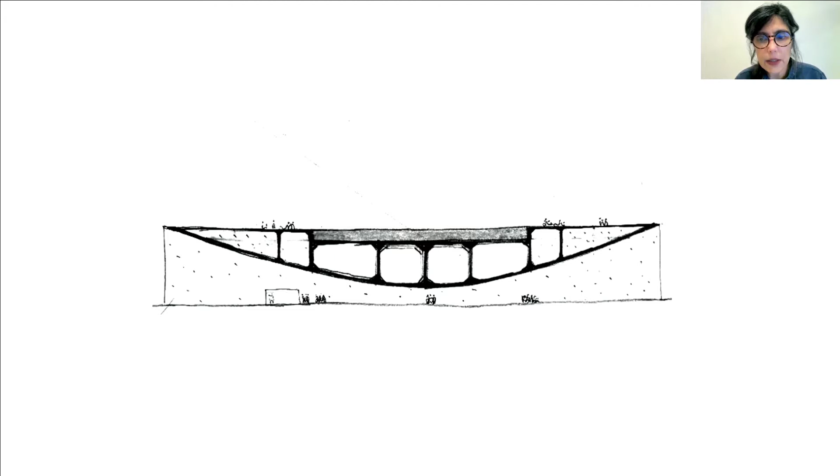In the middle of the Praça da República, a very important square in the center of the city, two concrete buttresses on the ends of 100 by 100 meters suspended volume configure a public swimming pool, and at the same time forms a marquee which provides shade for varied events, a party, a market, a meeting, an urban beach.

Architecture is made by people through the creative enjoyment of possibilities as they present themselves.

To imagine a SESC where the swimming pool is a fundamental part of the program in the center of São Paulo meant for us to imagine the biggest possible pool in the sun between the dense mass of constructed buildings.

It is amusing to think that the real estate market builds small pools on rooftop apartments that are marketed as a high luxury few can afford. And this is a popular public swimming pool with a capacity for 400 people simultaneously.

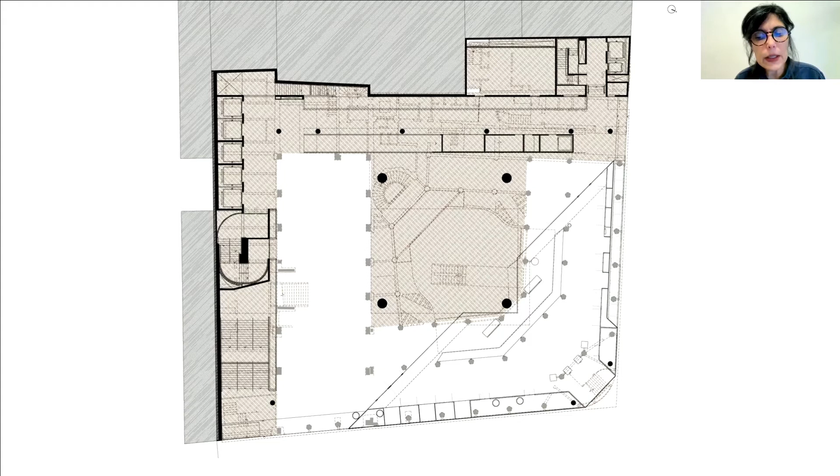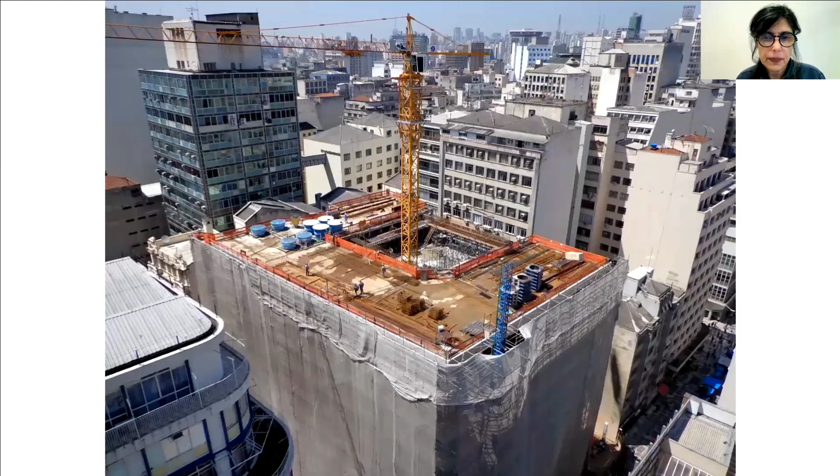The central void was also strategic for the organization of the construction, where a crane was installed once the entire lot was taken over by construction. That is the last floor of the existing building. The swimming pool above it.

In addition to the concrete pool, a large steel structure along the three limits of the new upper volume complements the solarium, and what corresponds to the depth of the tank accommodates the pool's changing rooms.

The set of activities is organized vertically, with each floor dedicated to a specific program, but related in sets of two or three floors. In some cases, the central void is kept, creating an association between two floors, as for example with exhibitions and art studios, or with sports.

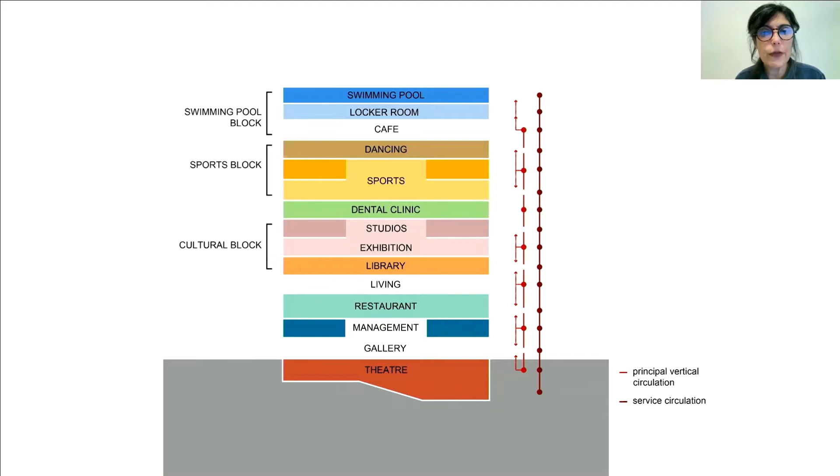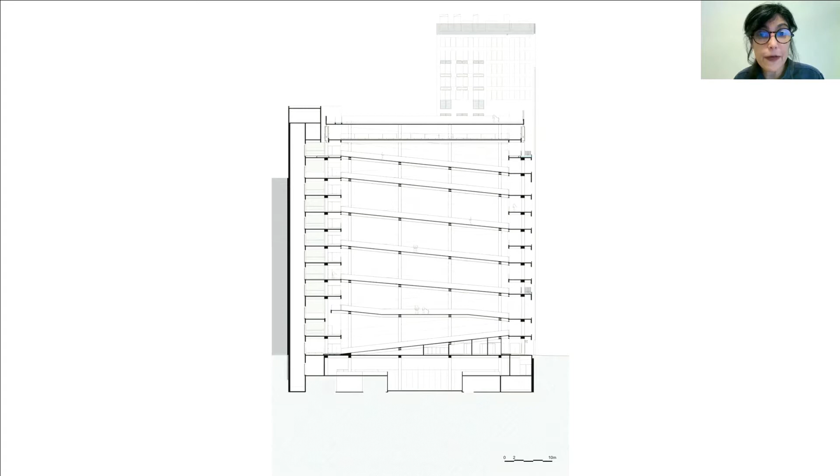In addition to the formal vertical circulation system of elevators and fire escape staircases, there is a ramp system running the entire length of the building as an extension of the sidewalk. It's like a continuation of a walk in the city where one finds different spaces: a cafe, a library, a square, a beach.

It is one way of experiencing the building in a very festive manner. The ramp itself is a place of meetings and games.

The Centro Novo, as this region of the historic center of the city of São Paulo is known, became what it is today between the 30s and 60s, with the construction of a notable set of modern, mixed-use buildings, with ground floors occupied by extensive shopping arcades that cut through blocks internally.

The corner was the access to the old shop. Although the building is no longer accessed from here, a large window onto the street was created.

This is one of the two accesses on Rua 24 de Maio. This is the ground floor plan, showing the double-height internal square I described earlier, with the reception volume forming the corner.

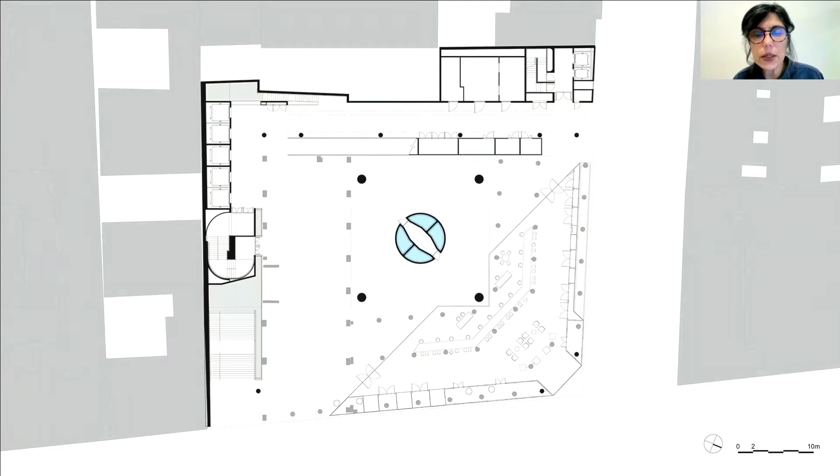He suggested that SESC should buy the building and made a beautiful comparison, saying the main building would be the ship and the small annex should function as a tugboat that approaches the ship for maintenance and refueling. SESC purchased the building, and this annex is where all equipment, toilets, changing rooms and storage are installed - a service annex, the tugboat.

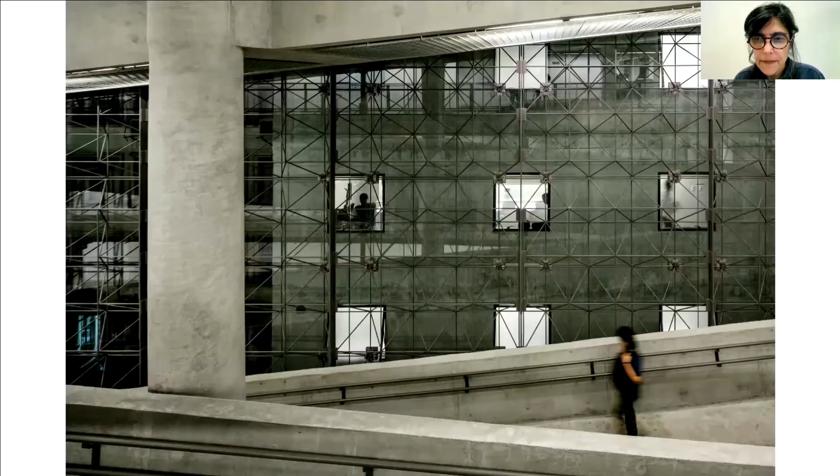An image of the square. The idea of the annex is always beautiful in architecture, the creation of your own neighbor. The annex can always be seen from the ramps and vice versa.

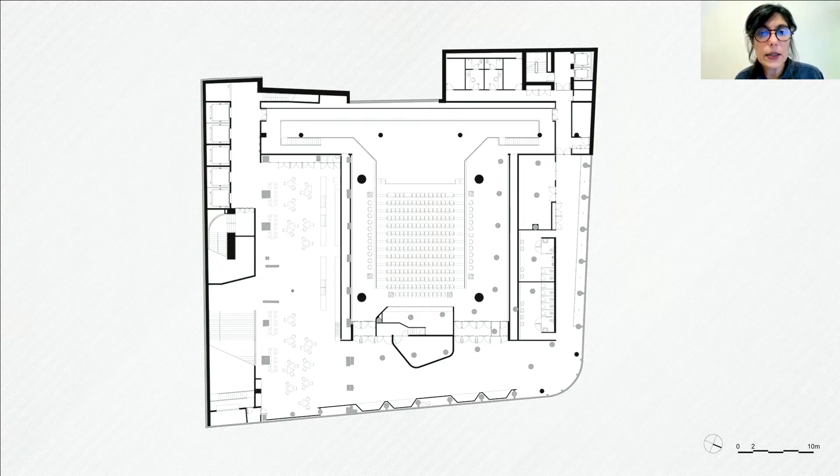The original building already had a basement used as a car park. We installed the theater here, which is still connected to the city by a 6-meter wide staircase - the cafe and foyer.

The original basement level was lowered by 3 meters in the central portion to form the void of the stage and develop the stalls, respecting the limits of the existing building's foundations. Dressing rooms are on the same level in the annex building.

At live concerts, people go to the side box to dance.

On the first floor, the administrative offices overlook the street and the internal central void.

The SESC restaurant is well known and popular, and at busy times a queue stretches along the ramps. I was told the other day that there was a street vendor selling sweets to the people waiting in line. I found it very funny, a completely urban situation.

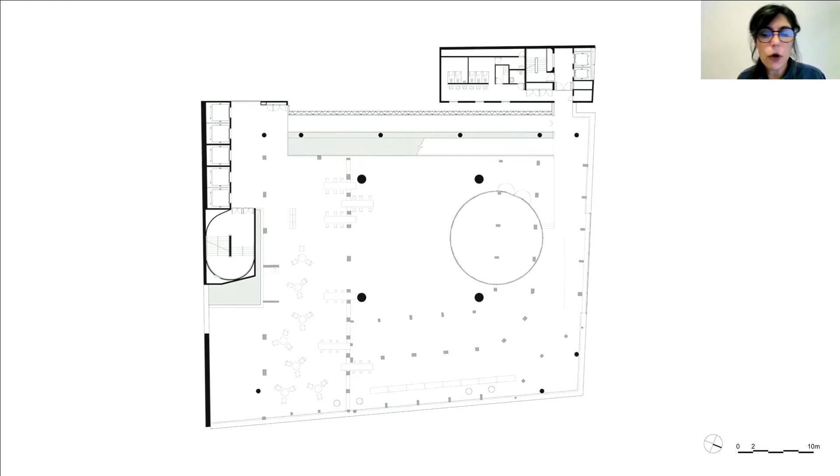Conviviality is part of the SESC program. This floor is open, without frames, free of any specific program, and functions as a strategically elevated square.

The library level. As I said, the library, restaurant, and conviviality make a block of the program.

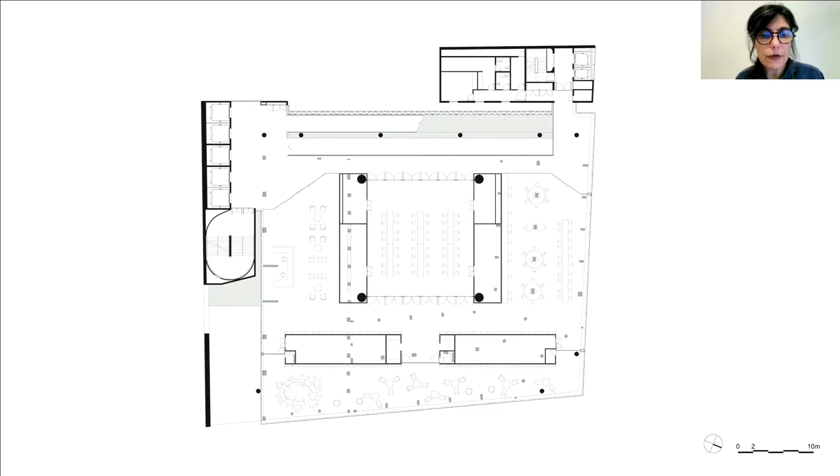The frequent columns were often used as support for furniture, as a strategy of transforming interference into something supporting an effective use.

The exhibition hall with a double height space in the center. The art studios are immediately above.

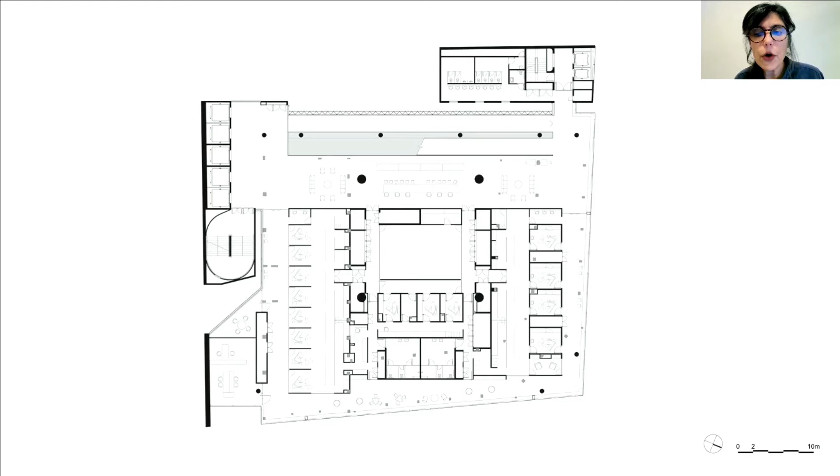The dental clinic. It's curious because SESC offers this health service among all the other cultural and sports programs.

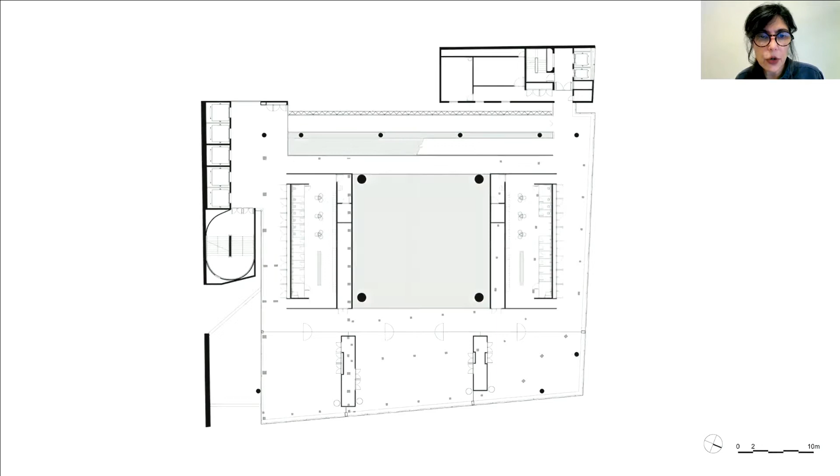The sports floor also has a double height central area. The changing rooms overlook the void that directly connects the two floors.

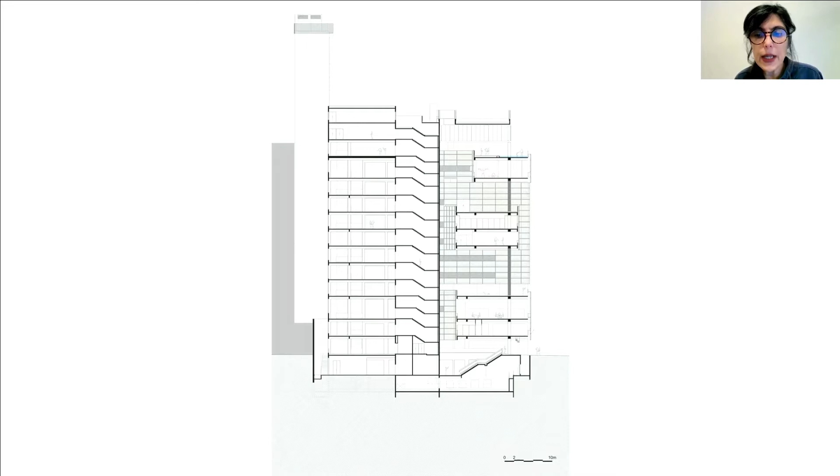This section shows one of the side alignments of the building, which in places abuts the neighbor, creating a situation of balconies distributed through different floors, with double or even triple heights. They are like elevated gardens.

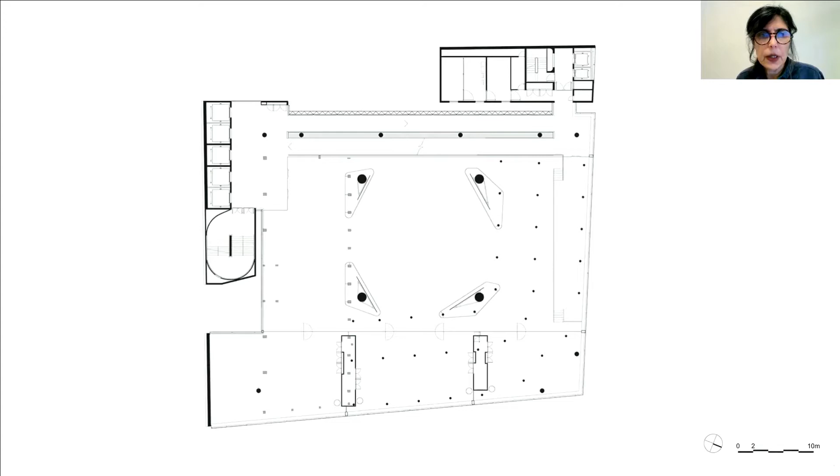In this case, it's the conviviality floor, or the sports floor, the swimming pool solarium. It is actually a lateral void that runs along the entire building. The dance floor: the 4 central columns support a set of bars and mirrors.

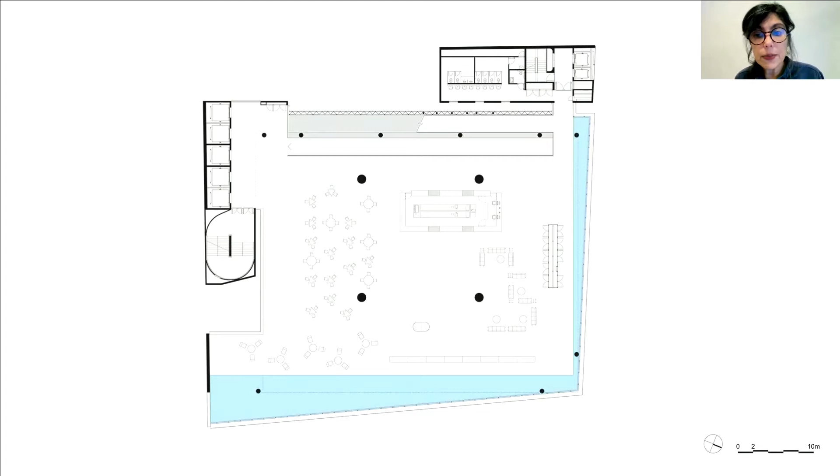This is the last level of the original building, clearly noticeable because all we see now is the new structure. It is the pool garden. Again, it's like a square with a cafe, which complements the pool program just above.

As the pool is one of the few places with controlled access for safety reasons, the reflecting pool on this level is a free water play area for everybody. Initially, we hadn't imagined this, but from the first day, people went into the reflecting pool and freely appropriated the space. Today, it is one of the most successful programs.

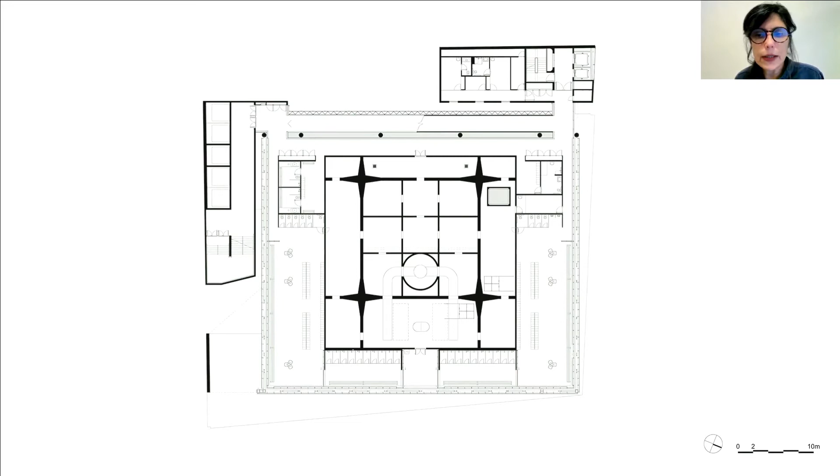The pool changing rooms are accommodated around the pool structure. The last stretch of ramp leads to the pool. The pool is 25 by 25 meters. It is the largest possible in this situation.

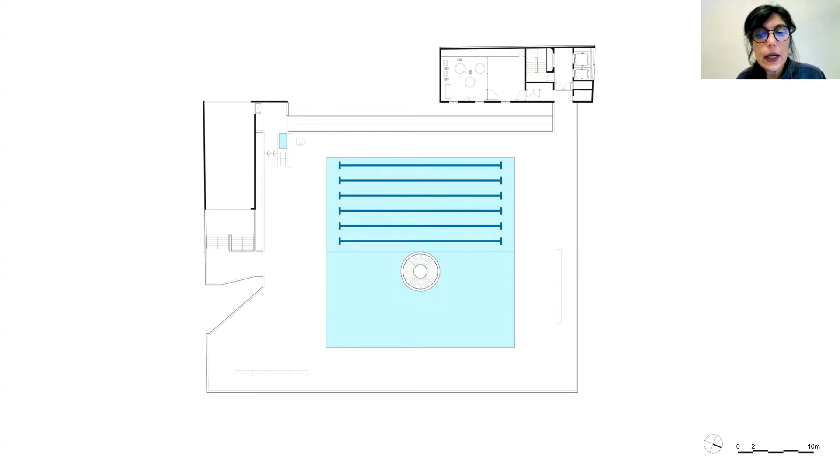We are also invited to design the furniture for the building. SESC 24 de Maio receives on average 10,000 visitors per day. The maintenance and durability of the furniture is an important issue.

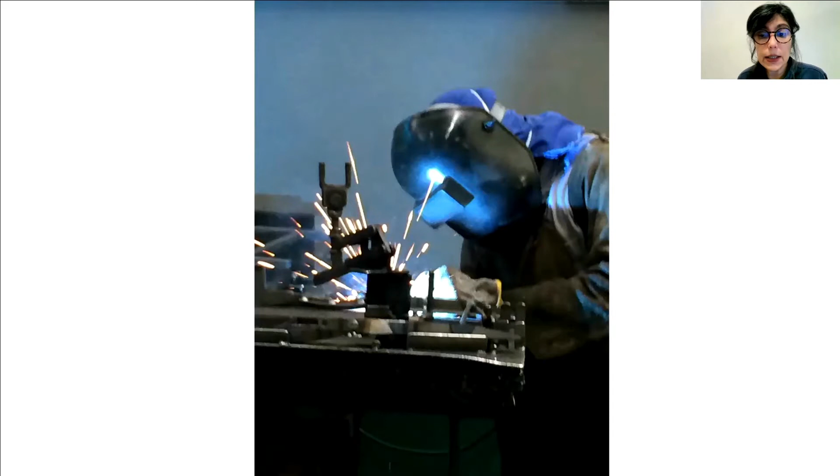This is why we choose steel as the basic material for execution of the furniture. We also like the idea of using construction labor, the solid bar, the metal sheet, the weld. The piece you see in the picture is one of those tools that are made on site to solve needs that arise. It is beautiful to observe the ingenuity and grace of the strictly necessary.

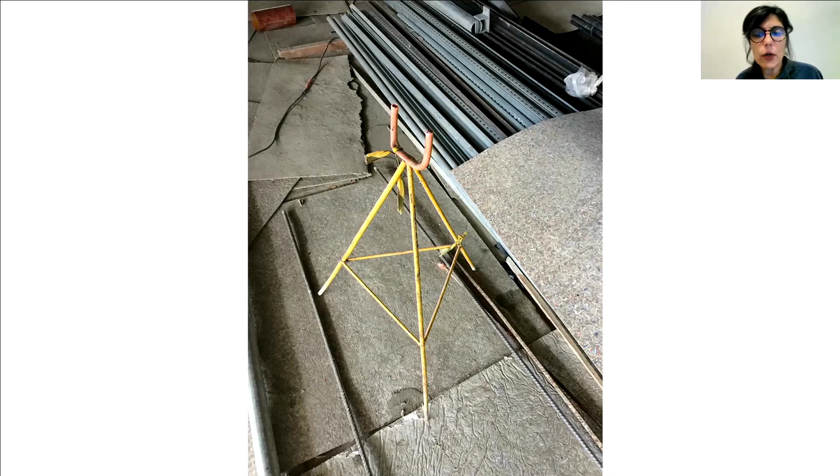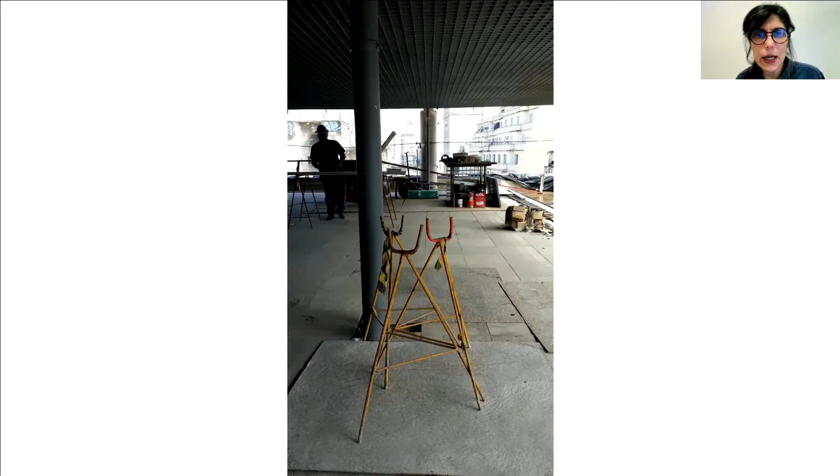The tripod, 3 points that define a plane, is the best way to relate to the often irregular floor of the construction. The piece attached on top is a support for all types of pipes or wiring during their installation, of quite varied heights.

This piece served as motivation for thinking about the design of all the furniture. The piece found in the construction became table legs with a different part for attaching the surface.

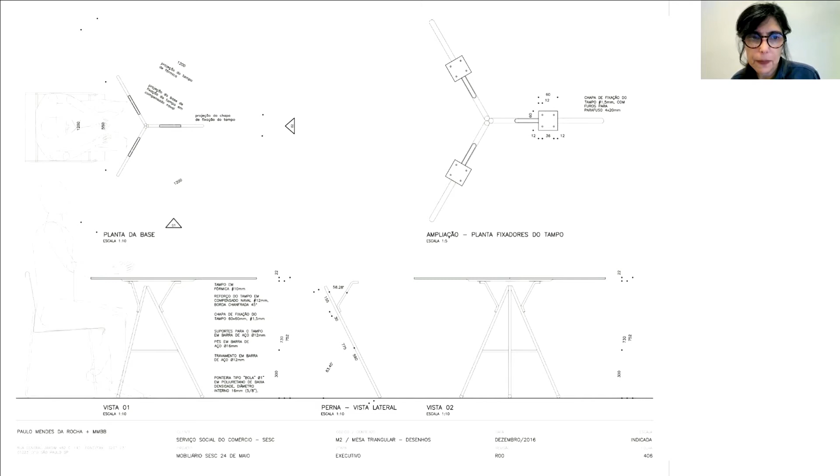The production of prototypes was essential. Steel has an interesting elasticity, but it needs to be well dosed by the geometry of the design. The first table we produced wobbled in such a way it was nicknamed tremor.

The triangular table allows for a number of interesting articulations. The chair, with and without arms.

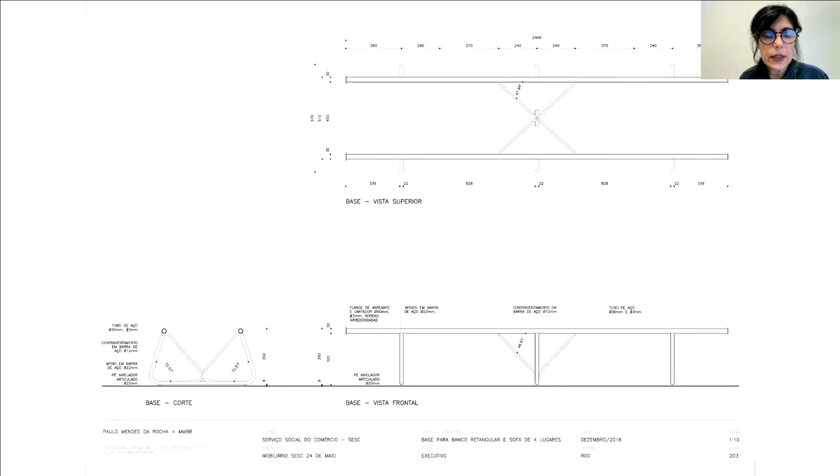The sofa is a curious piece to design for a collective use context, being such a domestic piece. We imagine a base structure that accommodates 4 seats. It is a system: the base,

Once again, the elasticity of steel associated to a certain geometry makes the backrest accommodate different types of people. The gap between the 2 plates accommodates the spinal column.

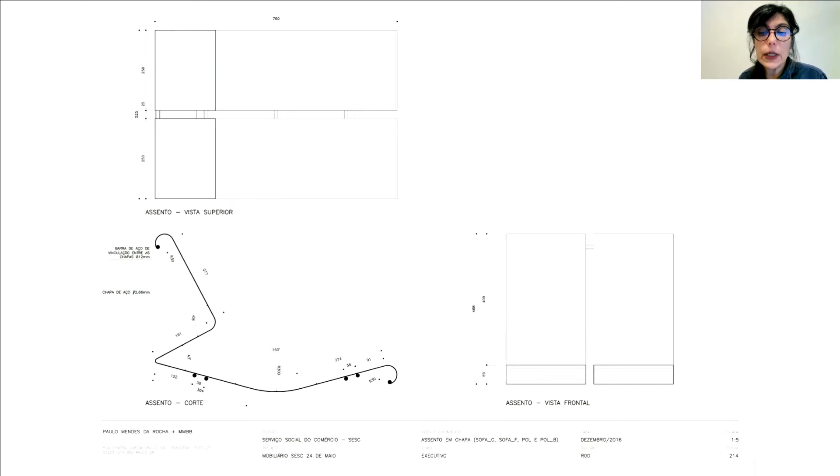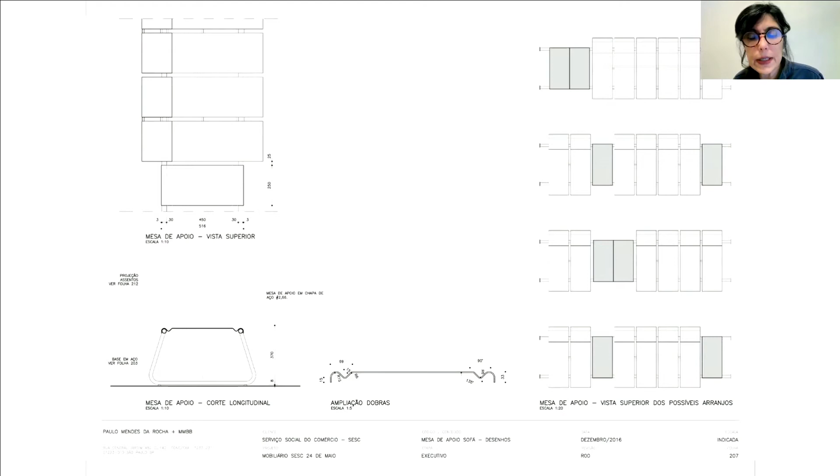There is a nice association when the direction of the piece is reversed. The furniture no longer has a front and back, people sit face to face. In Brazil, we call this piece a conversadeira or namoradeira, which we can maybe translate to talking chairs or flirting chairs. If you take one of the seats, one table can be installed as an accessory to the system.

The armchair is the same seat on another stand. And to change the stand, using a different geometry, the armchair becomes a low chair with greater inclination.